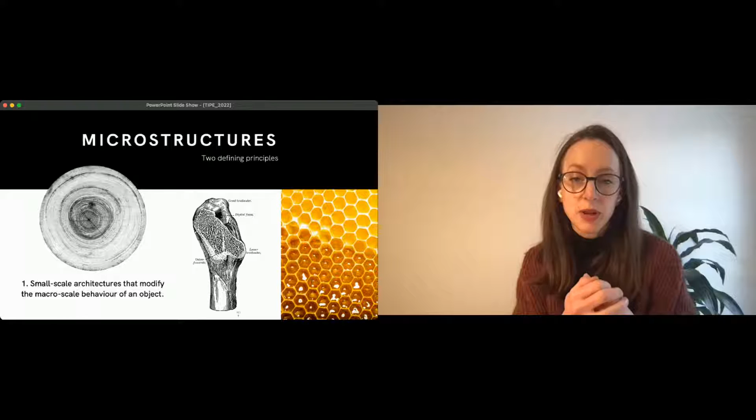So the examples on screen here are wood. This is actually a good example. The cellular composition of wood gives wood its characteristic behavior. We all know that if you cut wood with the grain, you get a different performance than if you cut wood against the grain. And similarly, the structure of bone: our bones actually form in response to forces on the bones, and it's a kind of a natural topology optimization where those microstructures develop in response to putting matter where it is needed most. So that's the first principle.

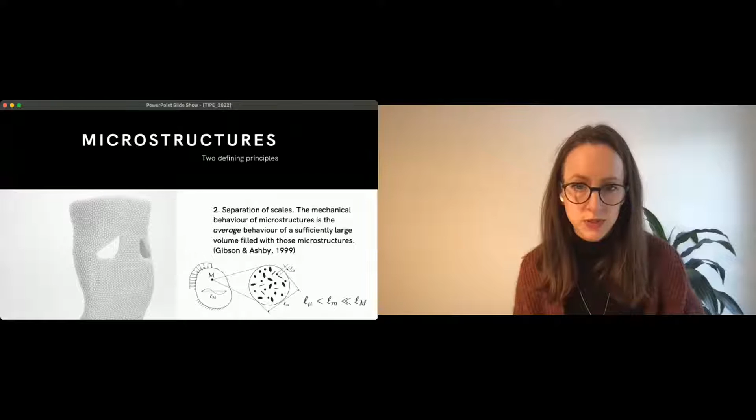And the second principle is this idea of separation of scales. I really want to conceive of microstructures and the mechanical behavior of microstructures as the average behavior of a sufficiently large volume that is filled with those microstructures. So you can think of this as in this part here, the lattice units, these little beams are very small relative to the size of the overall part. Or if you like the schematic, this little dot here is the microstructure, and it's very, very much smaller than the macro scale, the scale of the overall part. So these are the two key principles that I want to focus on for microstructures, separation of scales and the micro scale impacting the macro scale.

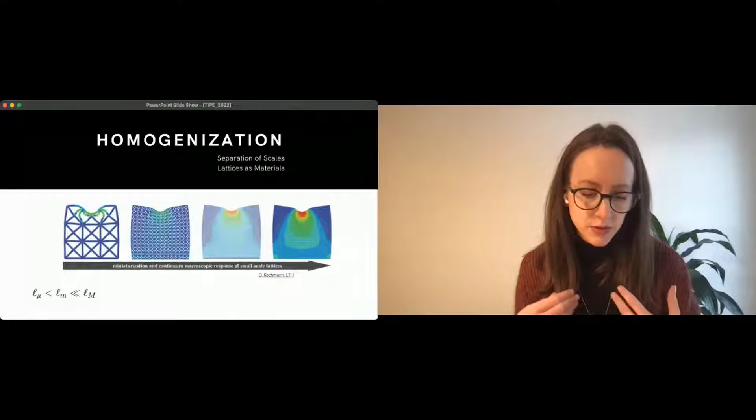Now, I need to talk a little bit about homogenization, and the motivation for thinking about that separation of scales is in part due to the idea of homogenization. When we're working with lattice geometry, for example, so lattices are a type of metamaterial, a lot of the time we get sort of stuck. I don't think you can see my mouse. So we get stuck on the left-hand side, where we're really viewing that lattice as a structure.

And if we wanted to do any kind of simulation on that, we would probably need to mesh it and do our finite element analysis on that. And anyone who's tried to do this with any quantity of lattice whatsoever knows that this is a huge headache and it's very difficult. And the point is that we can achieve uniform material properties by miniaturizing those lattice units so that they, again, become very small relative to the overall size of the volume being considered.

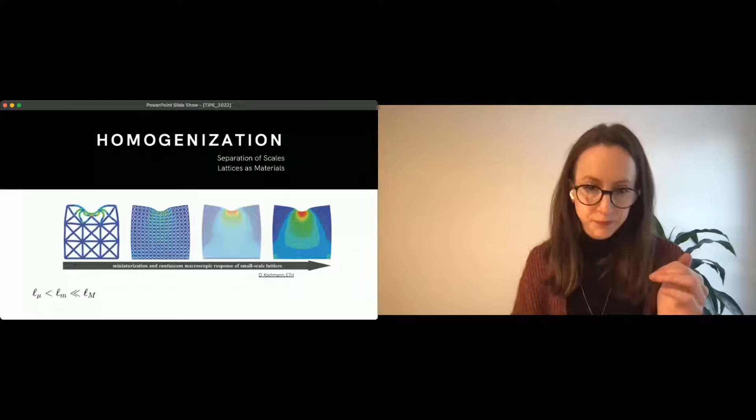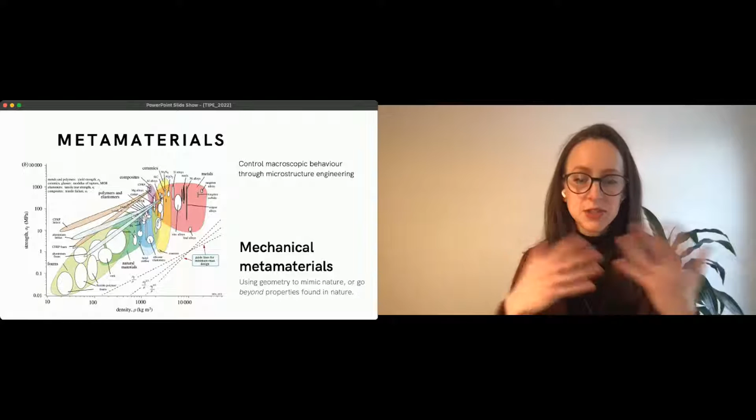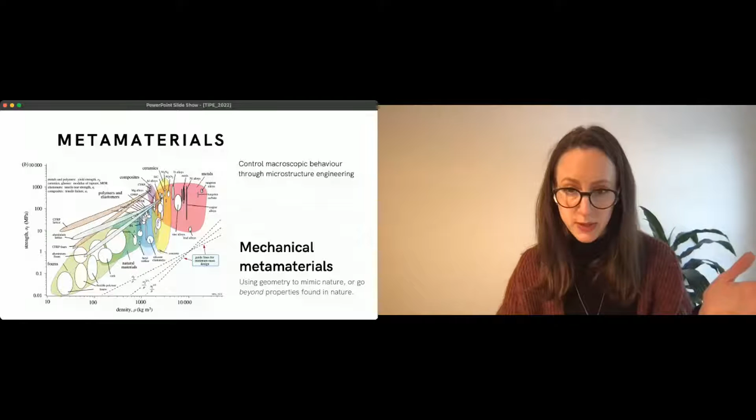And so that's really at the heart of this idea of mechanical metamaterials, that we can vary geometry to get really remarkable properties that actually go beyond what we find in nature and chart new territory in material property space. So when I say metamaterials, lattices, microstructures, I just want to throw this slide up. There are so many different terms that get used.

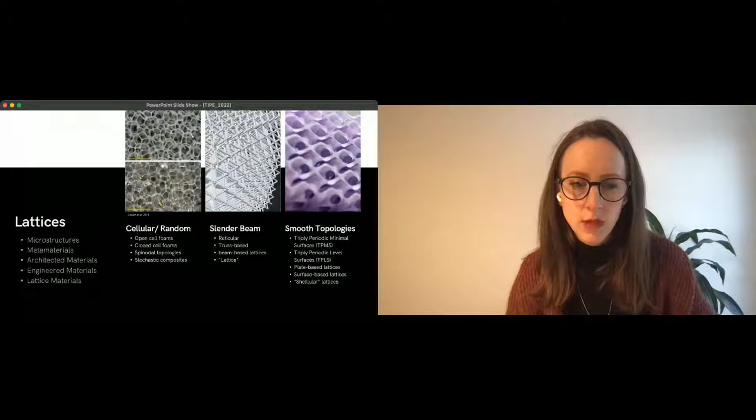Okay, so I do want to mention a few applications. So hopefully you've got a sense of what metamaterials are. And I think we've all probably seen a lot of applications of metamaterials already. Certainly, footwear and helmets. Metamaterials are used a lot for impact mitigation, which is why they come up so much in sportswear. And I think those applications are super cool. I've been working on those applications for a good number of years, so I really like them. But today I actually want to focus on a different set of applications, which are maybe less well known.

And these applications really come from this area. So in this first set, I have carbon capture and filtration. So on the left here is a recent paper out of Livermore National Laboratory on cellular fluidics. This is basically like a three-dimensional microfluidic design where they actually use open cell microstructures to control fluid flow. This is a super cool paper. And one of the interesting applications there is in carbon capture.

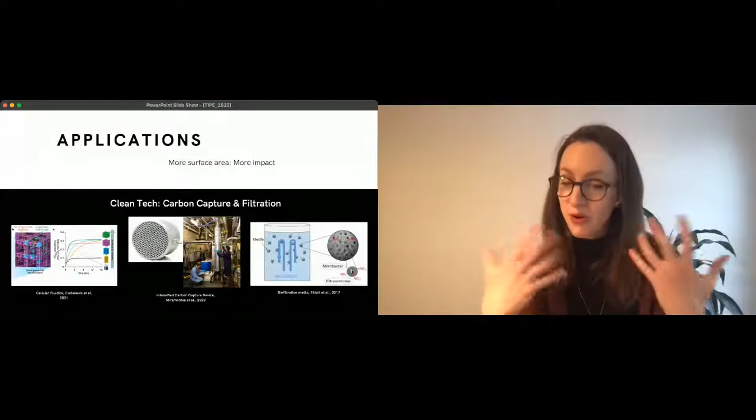And the reason is that they are able to expose a whole lot of air to liquid sorbent. So the air contains greenhouse gases, and by exposing more of it through more surface, you're able to capture more greenhouse gases from the atmosphere, which is very cool. Similarly, this is a carbon capture device that involved a heat exchanger. And the last application here is in filtration, environmental filtration, where the geometry actually controls microorganism growth. And the higher the surface area, the more material can be filtered out of the water.

The second set of applications is in heat and energy management. And again, I think probably many people have seen heat exchangers that have been produced through 3D printing. And these are a great use case for 3D printing. And it really, again, comes down to surface area. The reason those heat exchangers are so successful is that there's more surface for those two different temperatures to come into contact with each other over.

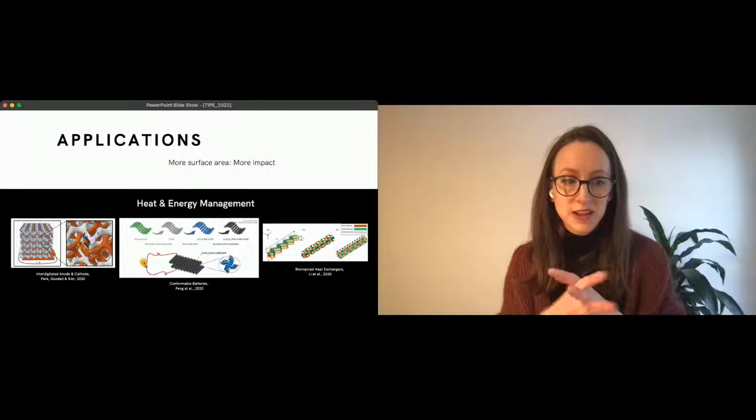And similarly for batteries, I think there's a really exciting opportunity in batteries because you have this possibility, by increasing surface area, of increasing the energy flow between the two parts of a battery. So those are just a sample of applications, and hopefully I've convinced you that metamaterials are cool and we should be thinking about how they apply.

But I now want to talk about some of the challenges. So I'm going to identify three challenges. The first is in exploration. And I find that often when people encounter lattices and 3D printing, they want to jump right on and print some lattices, which is cool.

But actually, how do you find the best lattice or metamaterial for your particular application? And this is kind of a more challenging problem than you might think, because the space of lattices is infinite. And how do you actually find the best one? So that's really the first challenge.

The second challenge is just complexity, that these are incredibly complex forms, many intricate details, and very high surface area. So this makes things like capturing them as a surface representation, like a triangle mesh, very unappealing. It's something you can only do if you're looking at very small quantities of lattices.

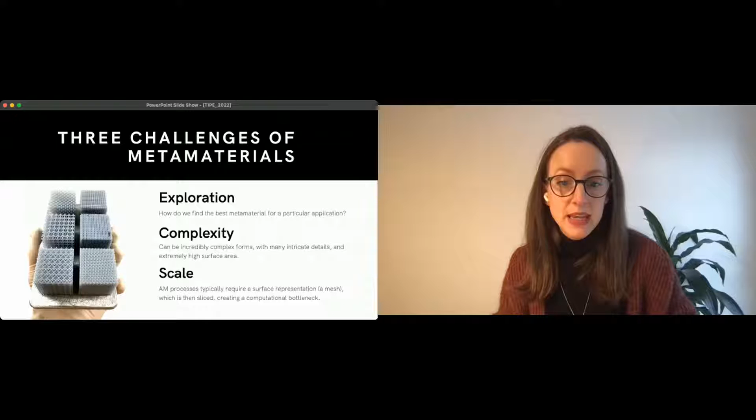And then finally, scale. So actually manufacturing these things. As I just said, many AM processes actually require that surface representation, which is then sliced and sent to a printer, which creates a computational bottleneck. So how do we actually communicate these lattice geometries in a better way to printers, to the hardware?

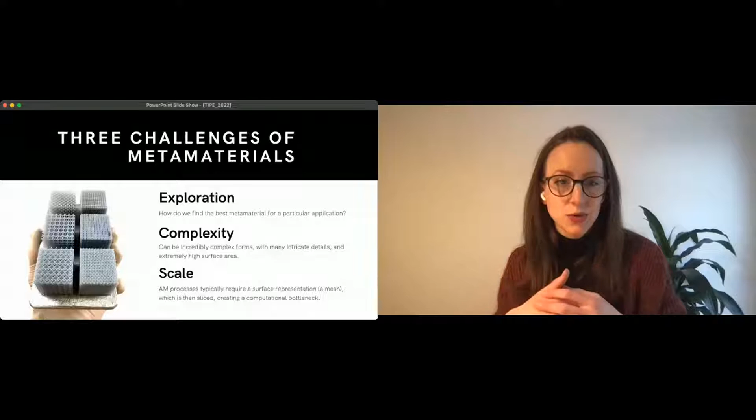So I could summarize it this way. It's a little oversimplified, but the way I see it is that 3D printing is really good at the moment at producing large parts, or on the other hand, it can produce small and detailed parts, but it doesn't do both at the same time. It doesn't print very large, very detailed parts. And I do want to mention that this is really not a very large part at all.

I saw a great talk yesterday about someone printing parts that are as big as a ship or an army vehicle. So really, how large can we go, and also how detailed? So what is the resolution-size trade-off, and does there need to be a trade-off?

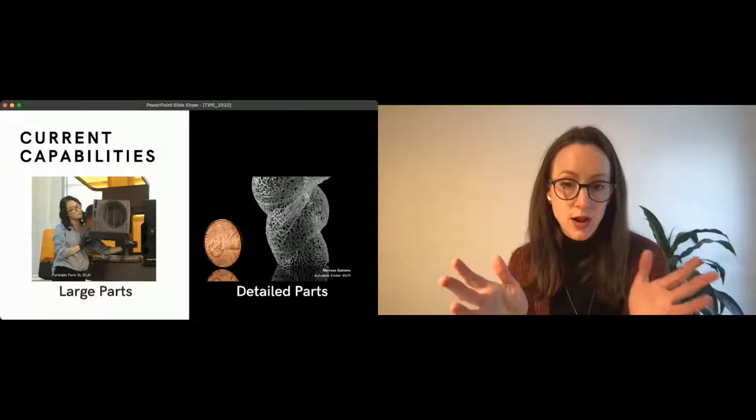So the result of this is that in my experience, there's really a limited use of metamaterials in industry. And so we see projects like this one, which I again think is a super cool project, but it really is still in that lattices-as-structures regime, where these are large lattice elements. We're not really viewing the lattice as a homogeneous material. We're viewing it as a structure, and it can give some nice properties, but it's really still in that structure area.

In addition to that, a lot of the research and the implementation has focused on only a handful of representatives of different cellular materials and lattice types. And this speaks to that exploration piece, that it can be hard to find the right lattice or new lattices to meet your needs.

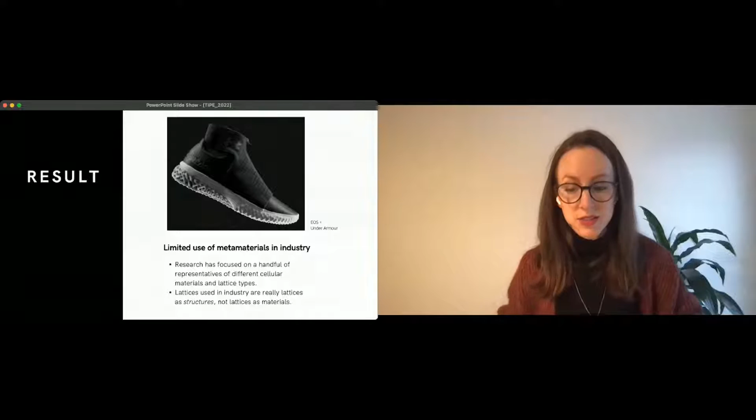So I do want to talk through some opportunities, an outlook here on how we might think about using metamaterials in an industrially relevant way. So the first is on that exploration piece. There has been some really interesting work in trying to solve this. So actually, the first one I want to talk about is something that I worked on.

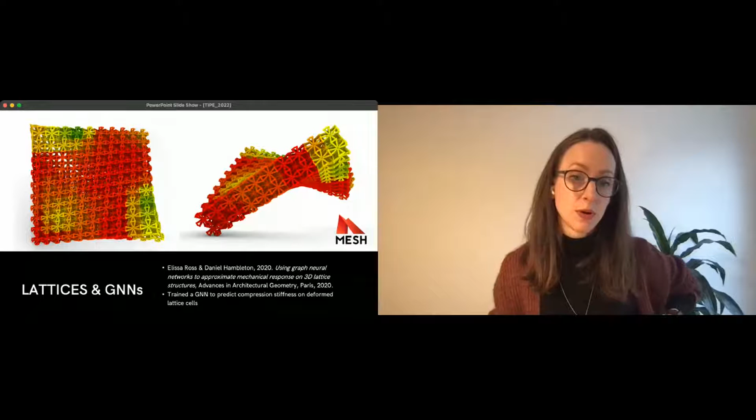So this is a paper I wrote with my colleague Daniel, where we trained a graph neural network on lattice geometry to predict compression stiffness. So this is really nice because it means that if you're a designer and you're trying to work with a lattice, you don't actually need to run simulation on the whole thing, but you can actually experience in real time, using that trained model, whether your changes are causing the lattice to become more or less stiff relative to a particular force.

Then moving to work that is not my own, but I think is super cool. So this is out of the ETH in Zurich. These are called spinodoid topologies. As you can see, they tend to be kind of bone mimetic.

But the authors of this paper basically created an inverse machine learning model where you would specify the performance characteristic, in this case a stiffness matrix, and the machine learning model would actually return a spinodoid topology, or really the design parameters of the spinodoid. So this is really cool, and it was really kind of the first instance that I was aware of an inverse model predicting metamaterial geometry. And on the right here are some samples that we printed of these forms.

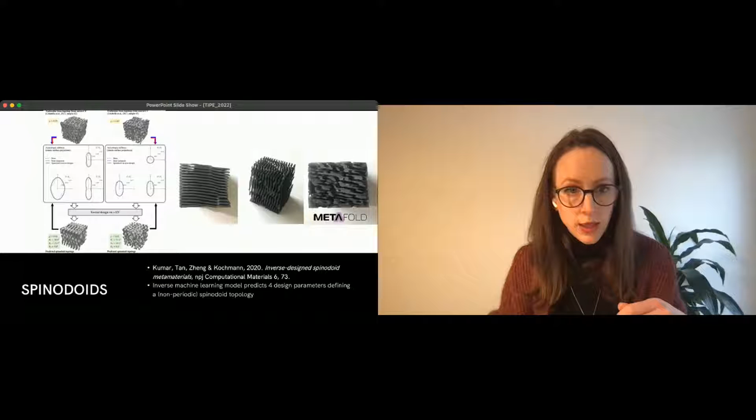Sorry about that. And then a second paper, also out of the ETH in Zurich, basically did the same thing, but for truss lattices. And here you specify your stiffness tensor, and the machine learning model will generate geometry that meets that target. So this is, again, a really cool way of working, that if you know the performance characteristic and you're okay with it being from one of these limited families of topologies, then you may have a solution. And again, on the right is just some lattice sample that we printed at Metafold.

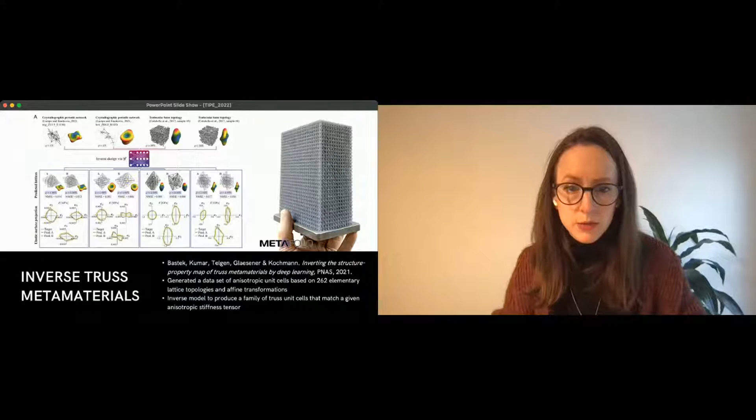So let me actually move now to what we do at Metafold and how we use some of these ideas.

So our big thing is to address both of these challenges, the exploration challenge and that complexity scale challenge, through new manufacturing methodologies. So the first part is like an exploration tool where we have a cloud-based lattice and metamaterials app. This is also a cloud-based slicer. So we have a curated set of lattices that cover a spectrum of different material behaviors, and those material behaviors are based on the idea of achieving length-scale separation.

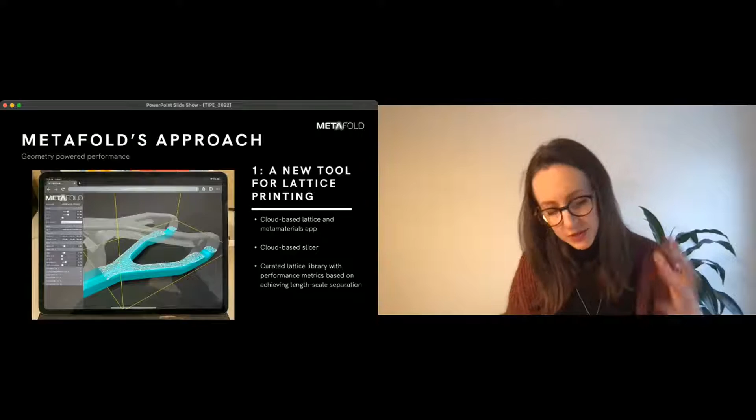So this is our web app, but once you've got your lattice geometry, this is powered by what we're calling geometry streaming. And this is where we're taking a very hardware-first approach to software. So the way I like to think about this is we're printing some kind of metamaterial or lattice geometry that is so large, so intricate, that we wouldn't want to represent it all in memory or try and spin it around or even slice it and send it to a printer.

So what we can do is actually work directly with printer hardware, and the printer hardware can kind of pull from the software. So the printer can say, I'm in position X, what do I need to know? And then the software will actually compute the geometry that it needs to execute that print at that time. And it goes along like this. So it's a tight loop between the software and the hardware.

And so it's not quite real-time slicing, but this is just-in-time slicing, where as soon as you've configured your lattice geometry, your metamaterials, you can hit print, and your printer actually begins printing right away. So you don't need to wait for that file to save, to load, to slice, to send. All those things are eliminated.

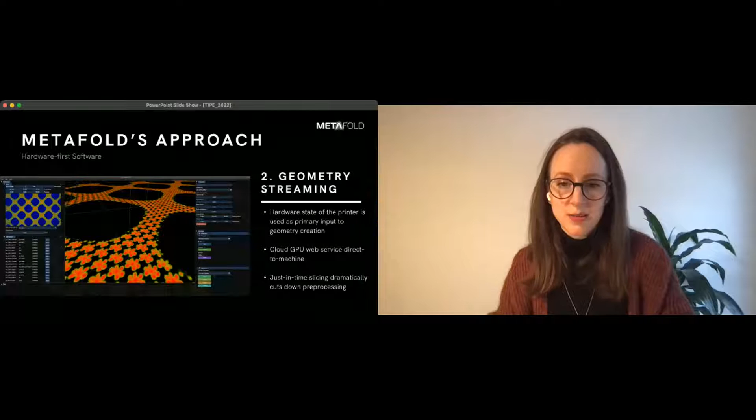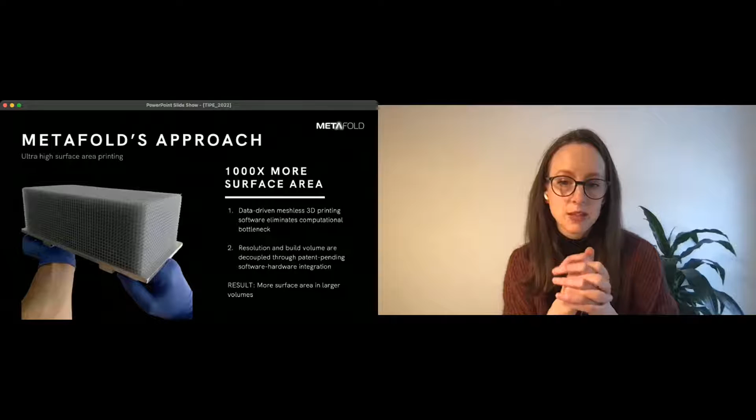And so the result of this is that we are just printing more lattices, more surface area. Using this very data-driven meshless approach, we're able to eliminate that computational bottleneck. And the effect here is that we basically decouple resolution from build volume. So there's nothing about this methodology that would not scale to prints the size of a tank or whatever you might want to do.

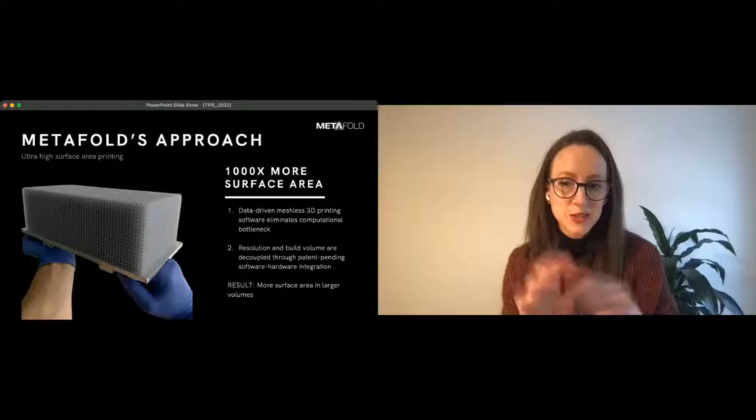So I think this is something that we're really excited about, this idea of scaling up dramatically some of these amazing advances that are happening within research, but that are kind of stuck within a very small scale. And I believe that a lot of that work that the researchers are doing on carbon capture, filtration, and energy management is potentially highly relevant not just to industry, but society at large, but that we need methods to scale up the production methodologies. So that's what we're really aiming for at Metafold.

And if I can conclude with a kind of outlook or vision, my first point would just be that surface area matters, that we need to be thinking about the restrictions that are placed on what we are printing due to the way we handle geometry. And if we are able to handle geometry in a different way, we're able to produce more surface area, and this can lead to incredible applications.

The second point is something that I've personally observed through years as a consultant, which is that often people think they want to design a lattice or design something, and what they actually need to do and want to do is solve some kind of engineering challenge. And that's really something that we care a lot about at Metafold, and we're trying to really bake that into our offering, to make it possible for people to actually solve their engineering challenges.

And then finally, as I already mentioned, we're really interested in amplifying the research that is already being done by the engineering community on metamaterials. And we have an open invitation to anyone who is interested in collaborating to push the boundaries of that methodology. So we're really excited about that.

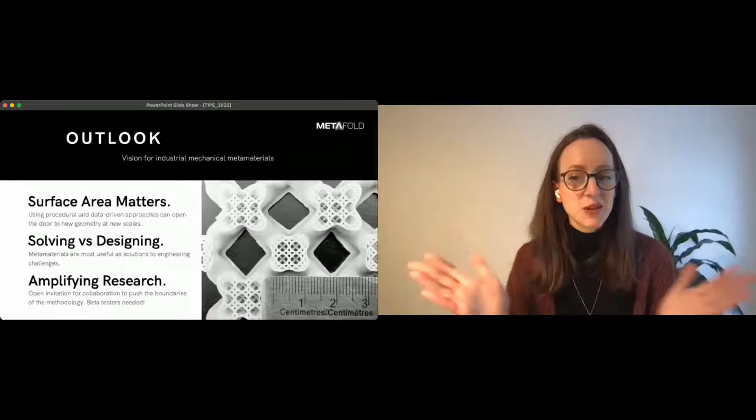Thanks, Elissa. That was super interesting. And we've got some questions coming in. The first one is, what additive technologies are you using to print these metamaterials?

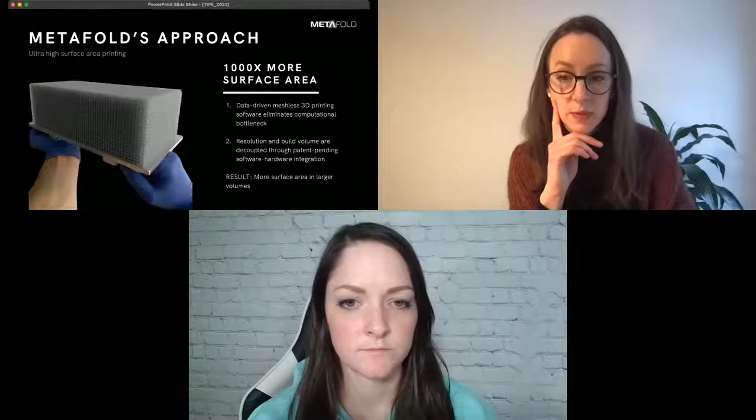Yeah, so that's a good question. So we prototyped a printer. Let me just go back here. Oh, sorry. Yeah, we prototyped a printer. It's what we printed this with. So this is a DLP-based printer that actually had a moving projector. So the projector slid along an axis, and that's where the hardware feedback really comes in, because the hardware can say exactly what its position is and tell the software exactly what it needs.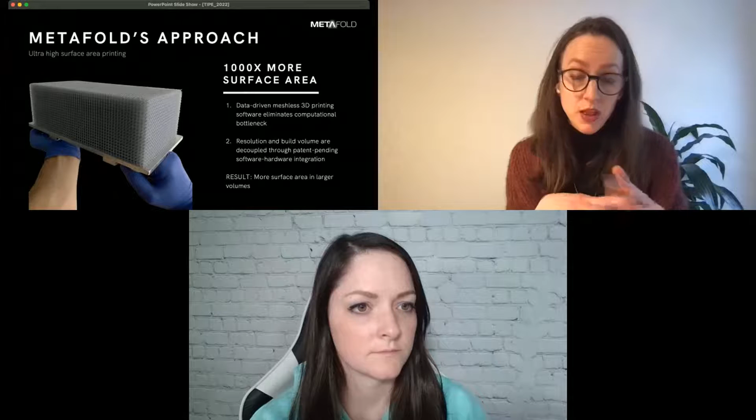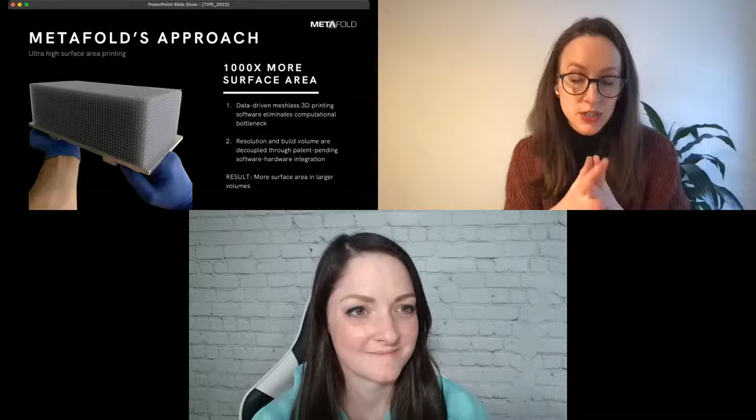And so you can imagine this scaling up to, you know, either more projectors in an array or on linear rails as we had. So our approach was a DLP approach. To be honest, though, these prints were printed on an Anycubic printer, like a consumer printer, just using our software to generate them. But we see a lot of potential.

Right away, our tech works with any DLP technology or MSLA, but we see a lot of potential for other types of AM processes. And so we're really excited about the idea of procedural toolpaths. We don't have a lot to say on that yet, but we're ambitious, and we feel like that's something that we can contribute to eventually. So DLP for now, MSLA for now, but other light-based techniques, and eventually, hopefully, a broader spectrum of techniques as well.

Great. What does the future look like for multi-material metamaterials? That's a mouthful. Yeah. Multi-material metamaterials. Yeah, so it's funny, we did think about this actually in the context of batteries, because with batteries you need multi-material printing. And so what does the future look like? I don't know, but I think that there will be a demand for it actually because of batteries. So that's all I can say.

You know, one of our decisions at Metafold was to focus on software, not on hardware. And I would love to see someone take up the challenge in hardware of that. And I believe that our tech would have something to say on the software end for the multi-material metamaterials.

Great. Are you able to understand fatigue life of metamaterials? Yeah, so that's something that is in the research domain. How do these things behave over time? And actually, one of the interesting things I can say about fatigue life is that we find, and it's been established actually, that those stochastic geometries, like the spinodal topologies and the other more randomly generated topologies, are much better adapted because they kind of distribute the stress.